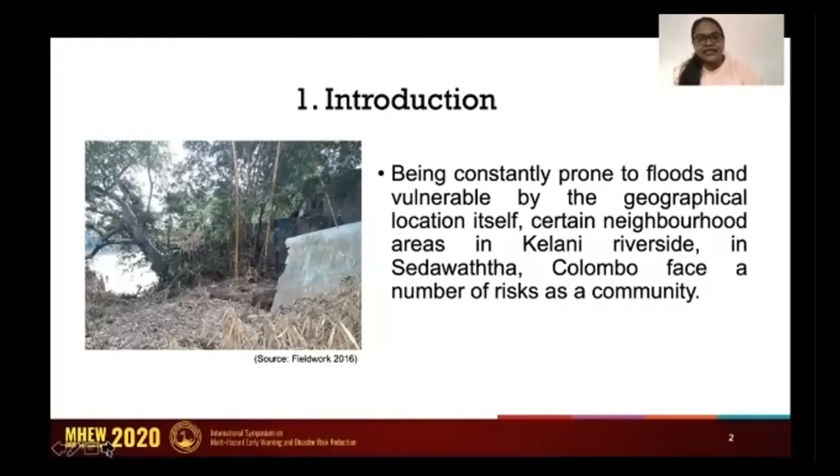Hello, I am Unnati Samaravira. My topic is flood survivors or flood dependents, a societal reading of flood victims in urban Sri Lanka. Moving directly to the introduction: though the narratives of flood-affected communities are pivotal to understanding the post-disaster context, they remain often neglected while developing DRR programs in Sri Lanka. People who live by the Kelani riverside form a community not only because of their geographical location itself, but also due to their socioeconomic backgrounds. Therefore, this study aims to examine the role of flood-affected people in the post-flood disaster context, particularly during the reactive recovery and reconstruction stages.

Speaking of methodology, using the purposive sampling method, this research is based on 50 questionnaires with flood-affected households, 25 in-depth interviews with flood-affected people, and 2 structured interviews with officials in Sedawaththa Grama Niladhari division in Kolonnawa.

Moving to key findings and discussion, I would like to provide two quotations from interview transcripts. Meena said, "When we heard that flood was about to reach, my brother-in-law came in his van. We hired a small lorry and left the house immediately. We took almost every valuable thing with us. Luckily we did it, because when we came back to check on the house after the flood, it was muddy and fully ruined. So my husband and I came with some male relatives and cleaned the house before returning back."

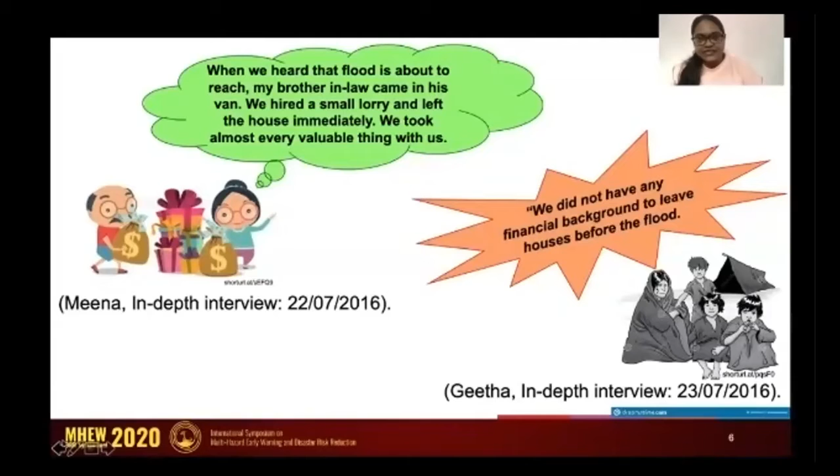The class dimension and available social supportive networks have played a major role during the reactive recovery and reconstruction phases of flood-affected people. Most of the flood-affected males were daily laborers whose income source is largely derived from the informal sector. Even their wives were from the informal sector, being either housewives, domestic servants on a daily income basis, or temporary cleaning staff. When they faced the flood hazard, not only were they financially ill-equipped to deal with such hazards, but they also suffered temporary unemployment, which later extended to permanent unemployment.

Therefore, flood-affected people with low-income financial and social support backgrounds in Sedawaththa can be identified as flood victims who have experienced an unexpected flood magnitude and have become helpless and powerless financially, socially, and politically.

Even though their identity reflects their victimization, the unexplored element is how they attempted to resume their lives as flood survivors as opposed to victims.

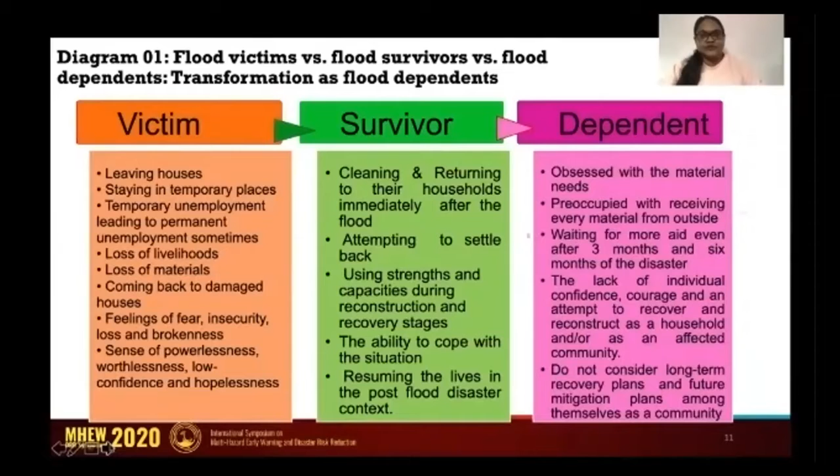Their notion of waiting for more aid and overwhelming material dependency upon any goods distributed as aid prove the fact that the flood victim identity has eventually transformed into flood dependent, as opposed to flood survivors.

When the survivors of the most roof-damaged households received asbestos sheets to repair their roofs, others who did not have their roofs damaged also went and complained, saying they also needed it. When a water rehabilitation program and garbage collection program were carried out in the affected area, the support and participation of the flood-affected community was at a minimum. They had a list which was provided to anybody who they thought would come with aid.

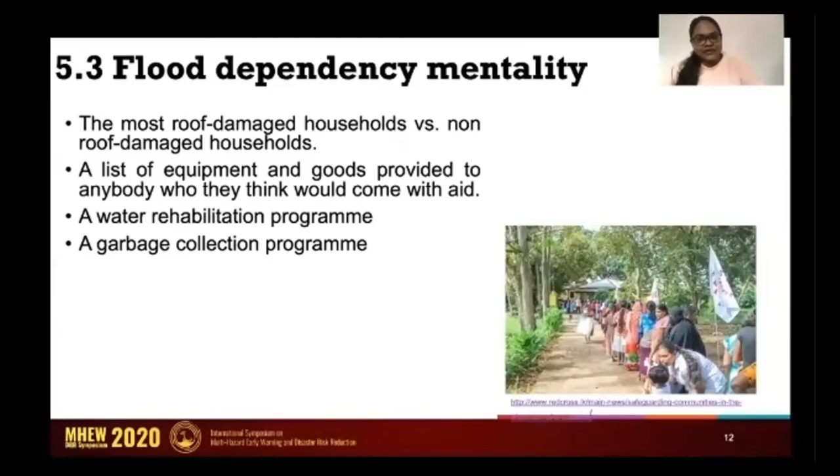Six months after the flood, the majority of flood-affected narratives of low-income residents revealed a notion of financial and material dependency upon non-affected communities and other supporting agencies, including the government. They believe that the sole responsibility of flood risk reduction is upon the government authorities. This shifting of responsibility to external entities has been part and parcel of the dependency mentality of flood-affected survivors who have become dependents due to the disaster.

In conclusion, this presentation argued how flood-affected people, being a vulnerable group, understand themselves and are presented by external agencies. They become flood victims during the reactive stage, who transform themselves into flood survivors, and then subsequently become flood dependents during recovery and reconstruction stages, with the continuous flow of financial and material support provided by external entities, including the government.

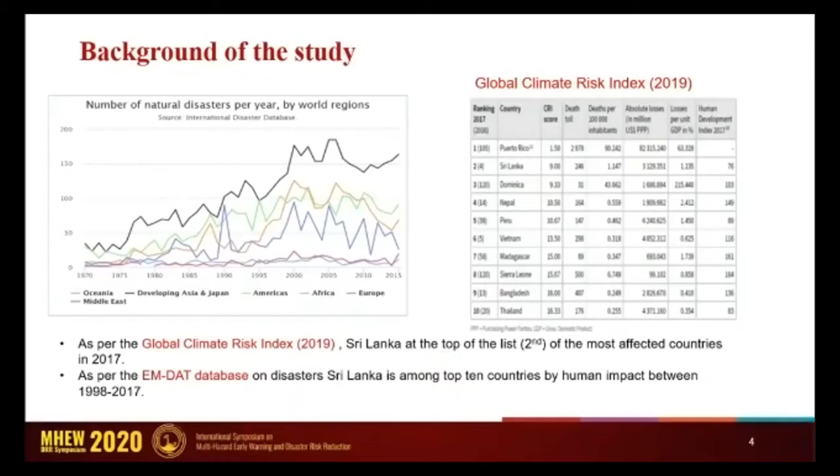When we focused on different regions and specific countries, we can see that during the period 1970 to 2015, developing Asia and Japan were the hardest hit region by disasters. If we look specifically at our own country, according to the Global Climate Risk Index, Sri Lanka was in second place in 2017 in terms of disaster impact, and in 2016 it was fourth place. Also, according to the EM-DAT database, Sri Lanka is among the top 10 countries by human impact.

Considering the literature on the impact of disasters on different economic segments and the outlook of the Sri Lankan economy, we will find out the impact of disasters on different economic sectors. Do the impacts of disasters vary between regions, and do some regions cope better with natural disasters? How do different segments of the economy perform after a disaster event?

For this study, our dataset comprises GDP of different economic sectors and a disaster index constructed for the purpose of measuring the impact of disasters. The index was constructed by normalizing the population affected from a disaster event by the population of the previous year. We have taken it as a percentage.

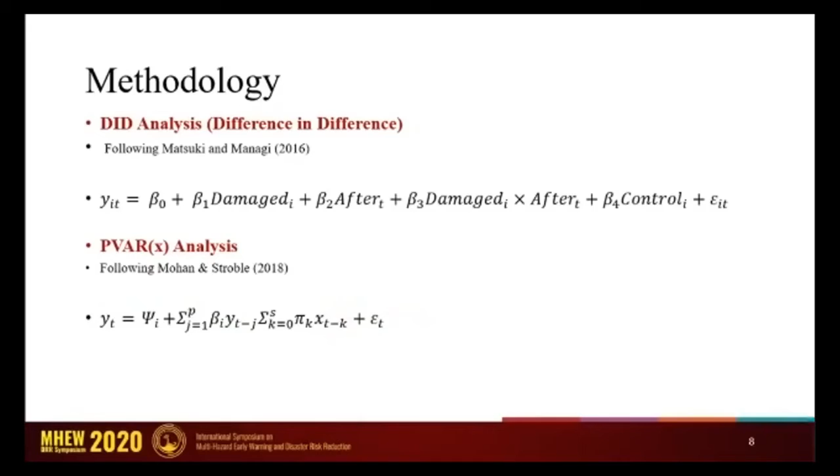Moving into the results, first I will explain the results of the DID analysis. In 2005, there was around a 7% decline in growth for both agriculture and industry. However, in 2006, only the agriculture sector showed a negative impact, while both the industry and services sectors grew significantly. In 2007, the growth continued through the year, although the impact on agriculture continued to be negative. Even though these results are indicative, they help confirm that the agriculture sector is the most highly impacted sector from disasters, while the industry and services sectors have shown improvement.

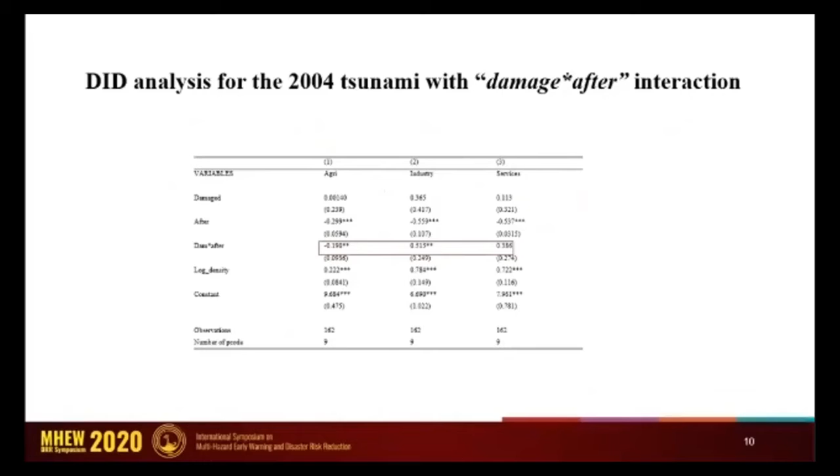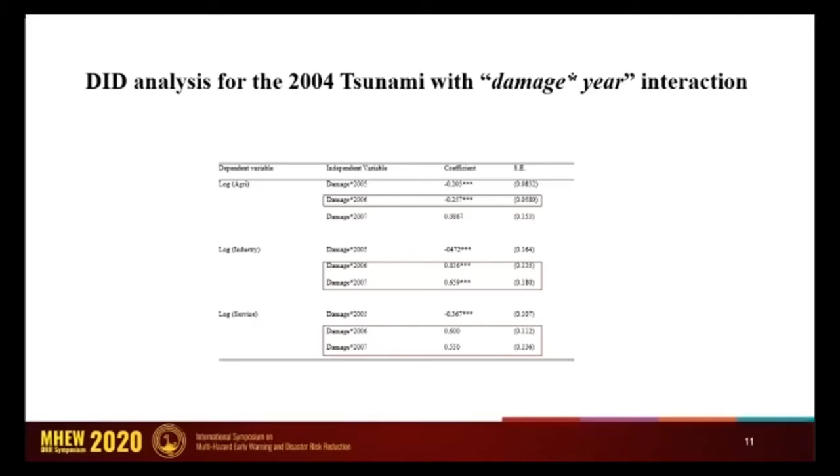These results indicate the increase in demand for reconstruction and building back better infrastructure after disasters, as well as considerable aid and grants being received for advancement of the industrial and services sectors. Further to that, the services sector generates more services during a catastrophic event and also increases the GDP of the sector. These backgrounds might surely contribute to the results.

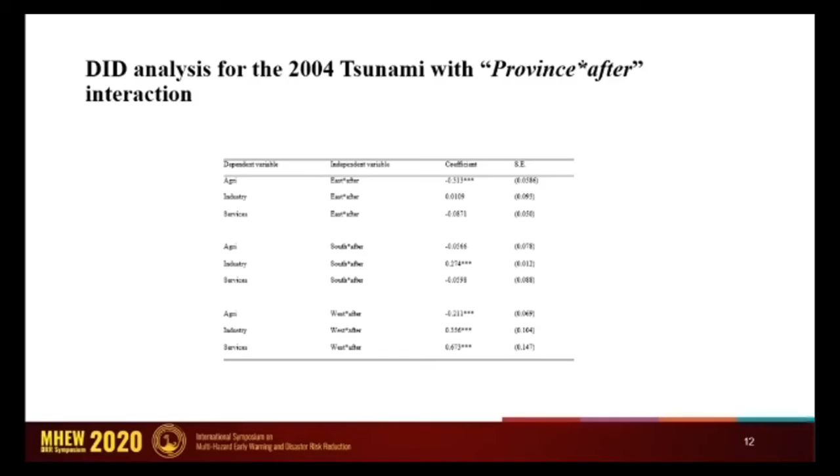The previous results as well as the past literature support this conclusion. A possible reason for this behavior is that after a disaster, governments typically take action to immediately repair damaged infrastructure. As well, new machinery and technology are likely to be purchased by governments, which may be funded by foreign aid and can also improve the sector's growth.

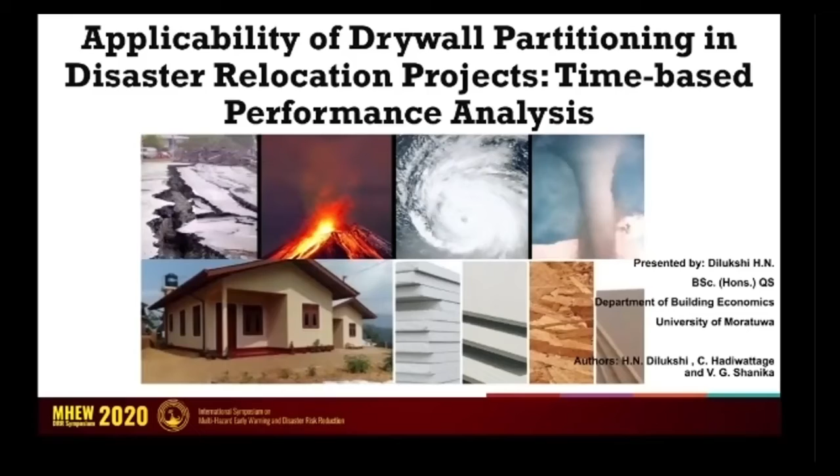Hello ladies and gentlemen, I am Dilukshi from University of Moratuwa. I am here to deliver a research on the applicability of drywall partitioning in disaster relocation projects. As far as the research outline is concerned, research findings comprehend both literature and empirical findings. Obviously, the outline leads us to the research background.

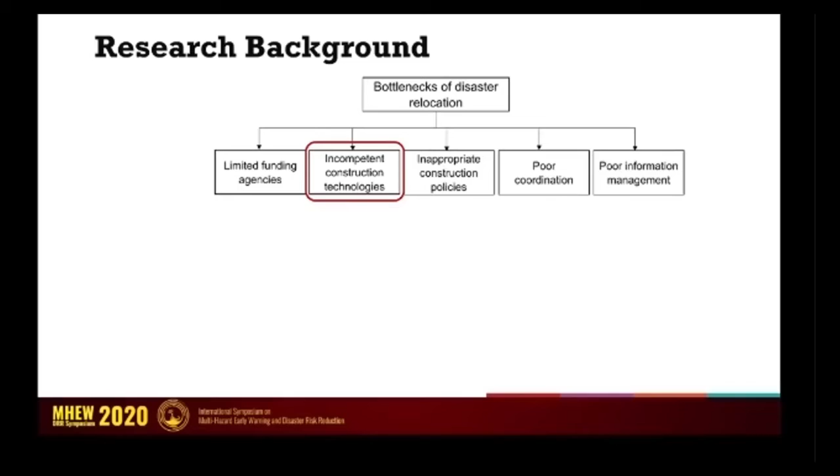As you can see, bottlenecks of disaster relocation contain 5 domains. Out of those 5, the third priority of the Sendai framework highlights the need of reviving incompetent construction technologies. Therefore, it's a crucial area to research. Especially among various building technologies, wall construction technology highly impacts the overall efficiency of post-disaster house reconstruction.

It is because of the high requirement of materials and labor hours when using traditional wall construction technologies. Literature synthesis highlights the performance of drywall technologies. For example, it has already established the better performance of drywall technologies for earthquake-induced disaster relocation projects. Thus, this study focused on measuring the applicability of drywall technologies for disaster relocation projects. Further, this study focused on the time-related performance of drywall technologies.

The problem is how we can answer this research question. So let's take a look into aim and objectives.

Our aim was to investigate the time-based performances of drywall technologies in response to integrated challenges of disaster relocation. As the intermediate milestones of this study, first it was to review the time-related challenges probed in disaster relocation and sort out wall construction challenges. Next, examine time-based performance of drywall technologies. And finally, rank different drywall technologies against time-related wall construction requirements.

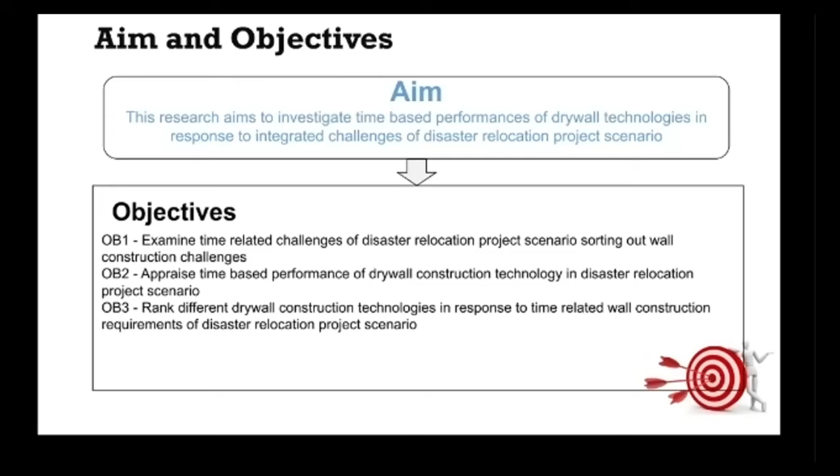Now I'd like to discuss the research methodology we adopted. This study employed a mixed research approach, as both qualitative and quantitative data were collected from the preliminary interview and questionnaire survey respectively. Preliminary interview process was carried out with 3 experts: 2 experts from disaster relocation and 1 expert from drywall technologies. All 3 were having more than 10 years of experience from their respective fields.

A sample of 48 experts was obtained for the questionnaire survey from 4 different fields to consolidate the findings. 3 quantitative data analysis tools were used: skewness, standard deviation, and mean weighted rating.

So now we come to the next section of the presentation, which is research findings and analysis. Here, OB code refers to the relative objective of the study achieved.

Time is a challenging parameter for disaster relocation because it is urgent to rectify the normal routine of the community, as well as to prevent spontaneous irregular resettlements on unsafe lands. When it comes to wall construction challenges, traditional wall construction technologies show a lack in performance in terms of time for disaster relocation projects because of its high time consumption during on-site process.

Existing research has already investigated the time-related performance of several drywall technologies for disaster relocation projects. For example, one study revealed that EPS panels consume 1.5 days of unskilled labor for a 130 square foot room, referring to the Sri Lankan context.

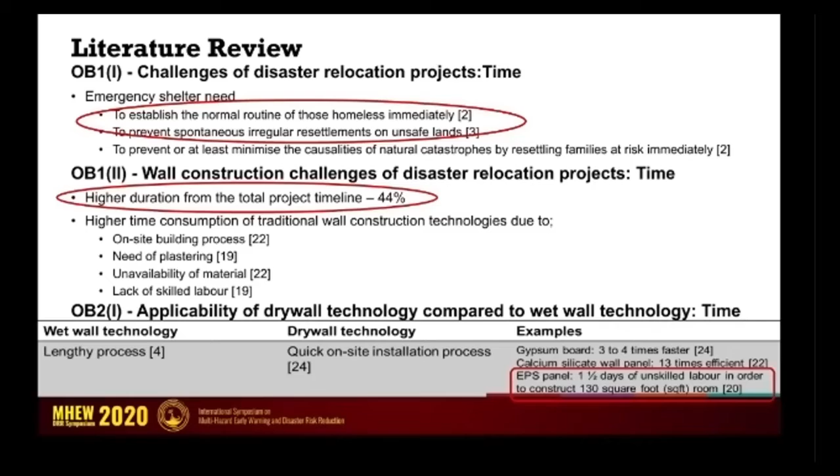So let's turn the discussion into empirical findings. Preliminary interview analysis divided the time efficiency requirement of wall construction into 2: on-site efficiency and off-site efficiency. Next, questionnaire survey ranked those 2 requirements representing the priority level for disaster relocation. Ranking was based on mean weighted rating values obtained from analyzing the responses of the questionnaire survey.

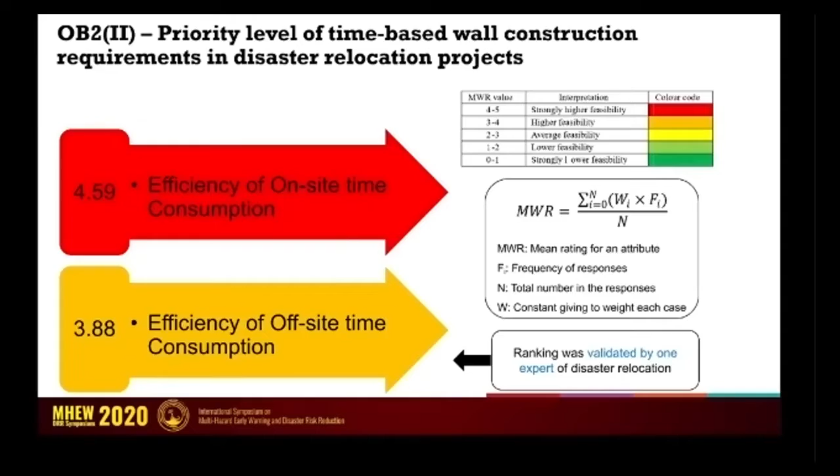Let's talk about the scorecard of 10 different drywall technologies. Now, the matter is where these drywall technologies came from. Literature synthesis reflected 18 possible drywall technologies, but experts of the preliminary interview omitted 8 drywall technologies considering the availability for mass construction such as disaster relocation in Sri Lanka, and ultimately shortlisted into 10.

Each score represents the feasibility of each drywall technology under each time efficiency requirement. Here, scores are mean weighted rating values obtained from analyzing the responses of the questionnaire survey. At the upper right corner, you can see the color code, which delineates the feasibility levels of drywall technologies. According to the color code, the first three are the most feasible drywall technologies under both on-site and off-site efficiency requirements, and the rest of the scores situate within the higher feasibility range.

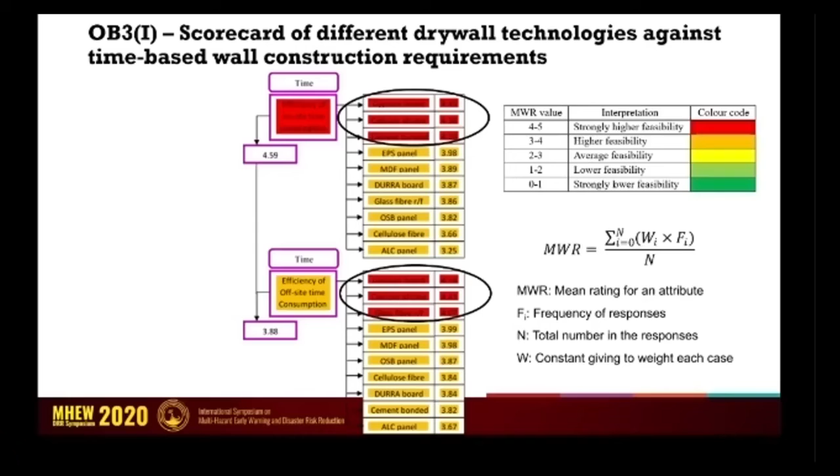I think this graphical illustration clearly shows the ranking of the overall time-based performance of different drywall technologies for disaster relocation. It's in descending order from top to bottom. Mean weighted rating values obtained from the scorecard were applied to this equation in order to derive the overall time-based feasibility of each drywall technology. As you can see in the graphical illustration, it delivers gypsum board partitions as the most efficient drywall technology for disaster relocation projects, and calcium silicate wall panel board comes next in the order.

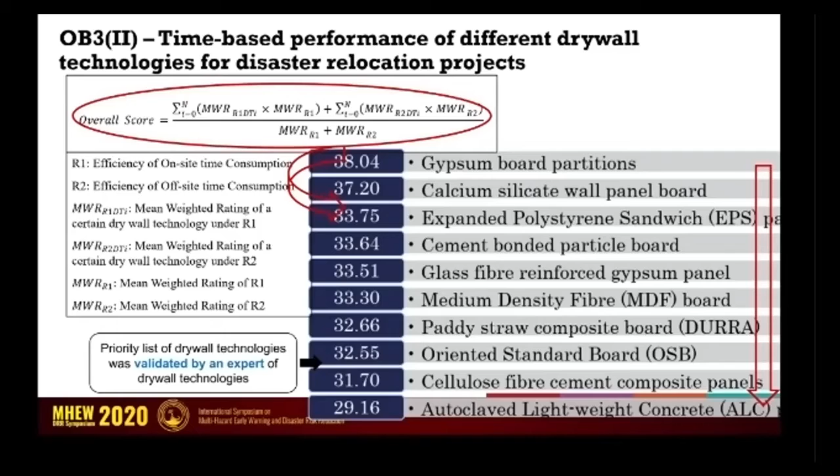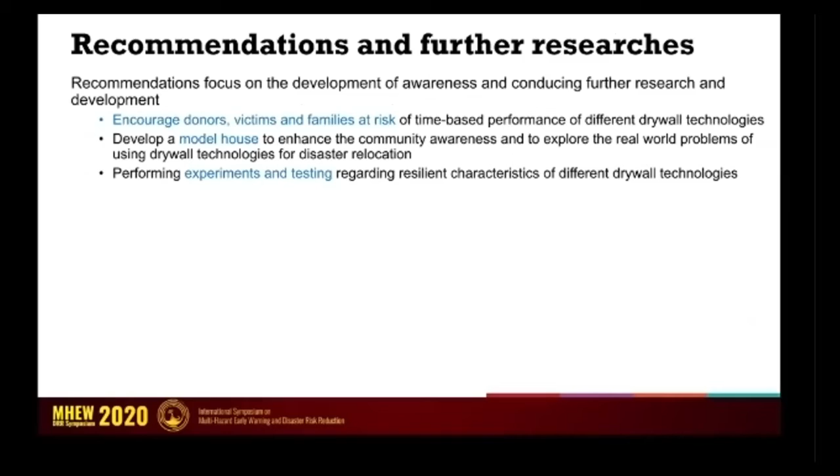In any research, the most important part is how we can use the findings in reality. Therefore, to put the findings into practice, recommendations focus on enhancing the awareness of the time-related benefits of different drywall technologies to donors, victims, and families at risk.

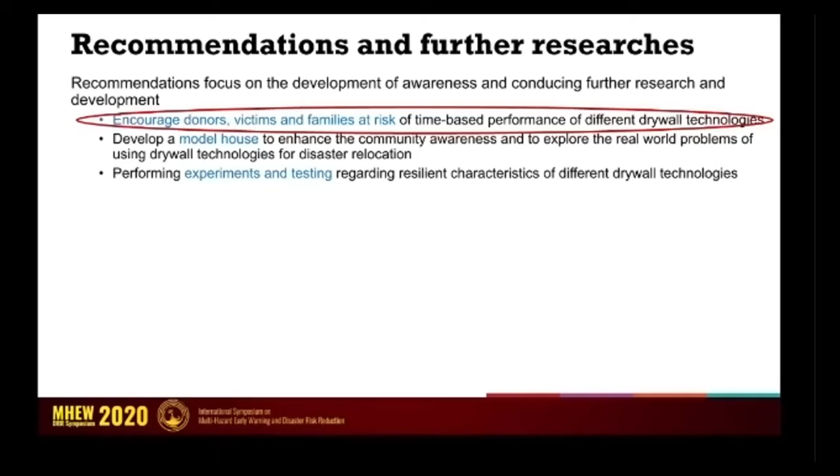Earthquake-resilient characteristics of drywall technologies are already established, as I previously mentioned, but it needs further research and development to test the other resilient characteristics as well.

Now I can just summarize the main points again, clustering into the objectives of this study. Traditional wall construction consumes 44% of the total project timeline in disaster relocation projects. Literature provides a narrow view of the time-related performance of drywall technologies, roughly establishing the 3 to 4 times higher performance of drywall technologies. The scorecard facilitates a comparative analysis of the time-based performance of different drywall technologies to practice in disaster relocation projects.

Finally, gypsum board, calcium silicate panels, and cement bonded particle board represented the best performance under on-site time consumption efficiency. Gypsum board, calcium silicate panels, and glass fiber reinforced panels became top ranks under off-site time consumption efficiency. Ultimately, this research will be a crucial investigation to resettle both victims in disaster relocation and families at risk.

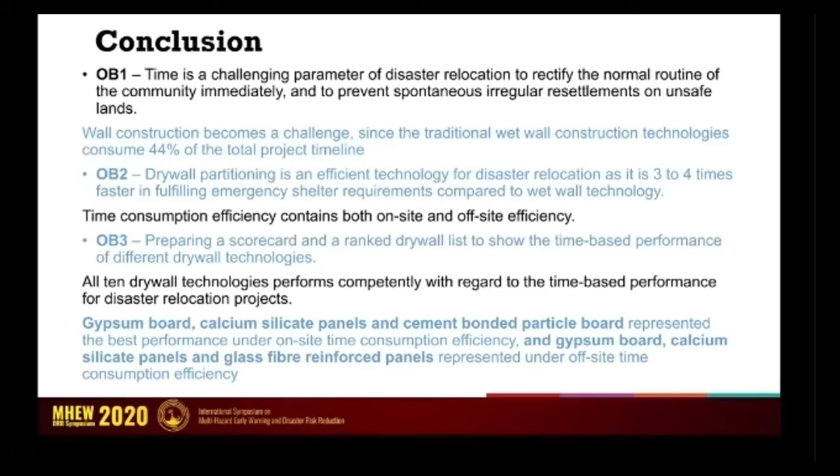Thanks very much, Nimasha, for the video and the presentation. We do have Nimasha with us in the audience. So, any questions to Nimasha? Any questions? We do have more people in the audience as well. So please do engage and ask questions. Get any issues that you have clarified from our presenters. Any questions to Nimasha in the audience? Can't see anything in chat.

Okay, while we wait for a question, Nimasha, have you observed drywall partitioning being used in any sort of post-disaster reconstruction or relocation project in Sri Lanka as of now or previously?

No, not yet. Drywall technologies are currently not used for disaster relocation projects in Sri Lanka, even though drywall technologies have a spectrum of advantages for house reconstruction, especially regarding time efficiency. But NBRO is still researching the use of drywall technologies. I think this piece of research would inherently be supportive for the way forward of combining drywall technologies and disaster relocation projects.

Okay, that's very interesting. It's good to hear that NBRO is engaged in that research as well. Another question: what do you think about the resilient aspect of drywall technology? Say, for example, if the same area, let's say we're talking about a flood prone region, and that same area gets flooded again,

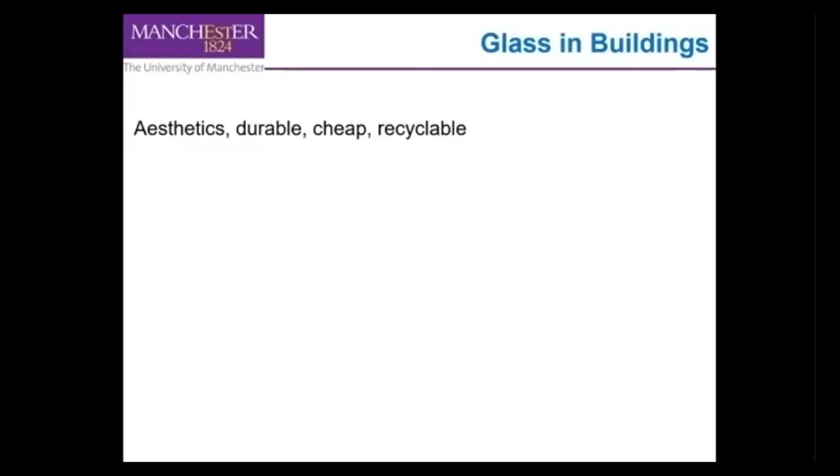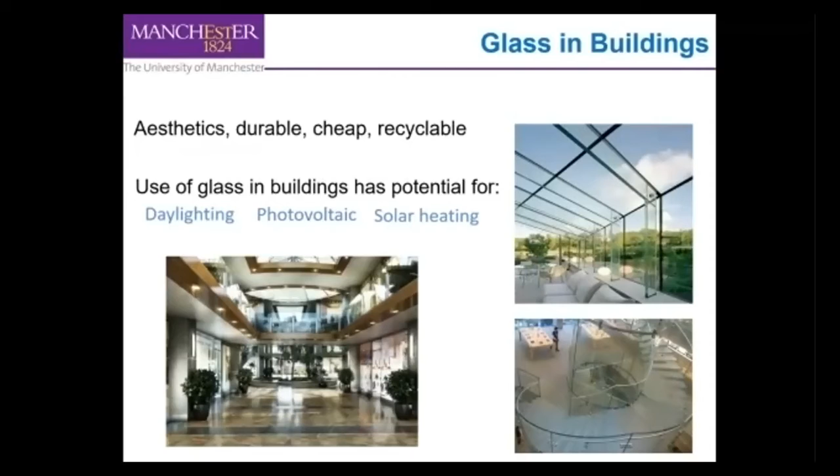We all know that glass is increasingly becoming a more popular construction material. The main reason architects really like it is because of its aesthetic characteristics. Glass is durable and cheap, and also recyclable - this recycling aspect, the circular economy type things, are really useful these days. You can make perfect glass from old glass, which is not true for most other materials. As I said, it can improve daylighting characteristics, and we can also gain solar energy as well as solar heating.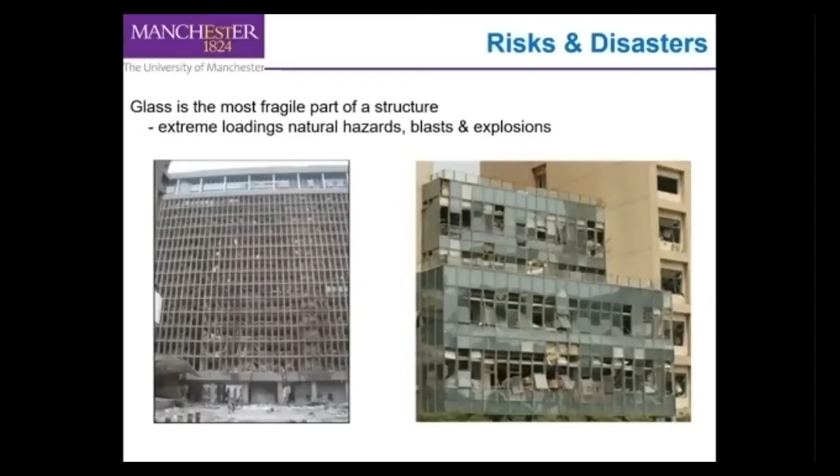However, unfortunately, although glass has so many favorable characteristics, it has some issues as well. It's usually the most fragile part of a structure under an extreme loading event. For example, as you can see in these two photos, these are real situations from the past. In both cases, glass panels were removed from the building, whereas the main structure or the other parts of the structure remained largely intact, which shows a clear problem with glass during an extreme event.

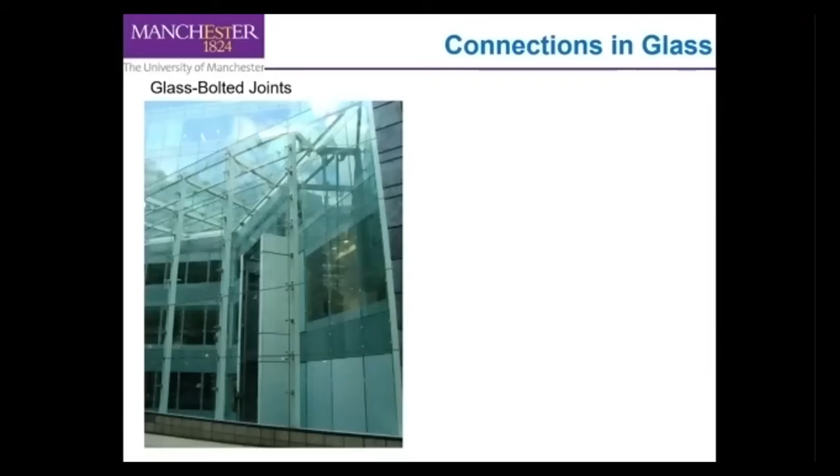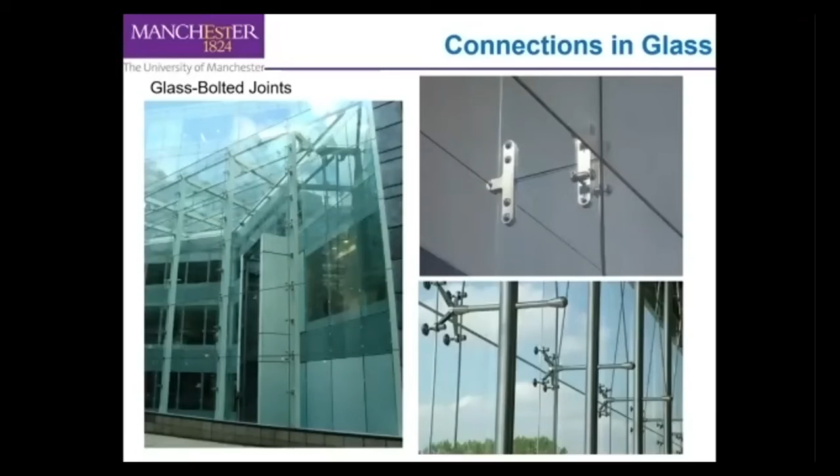The reason for that is actually the inefficiency of the joints we use. As you can see, we use a number of designs like bolted joint connections. This one shows connecting glass panels to glass panels using this type of joint, and this joint shows connecting a glass panel to a main structure - these types of joints are called spider joints. You may not be surprised by the name. People use this, but unfortunately it's not the most efficient and safe.

Because glass is a brittle material with low tensile strength compared to steel or aluminium, whereas to make bolted joints we had to make holes, damaging the surface. This means we weaken the surface at highly localized stress concentration areas. High stress concentration combined with weak material means it's not surprising we will see failures at the joints. Because of this, in most glass structural design, the joint design governs the actual design, which results in usually thick and heavy panels, because you need to make sure the joint can carry the loads. It's not efficient, obviously.

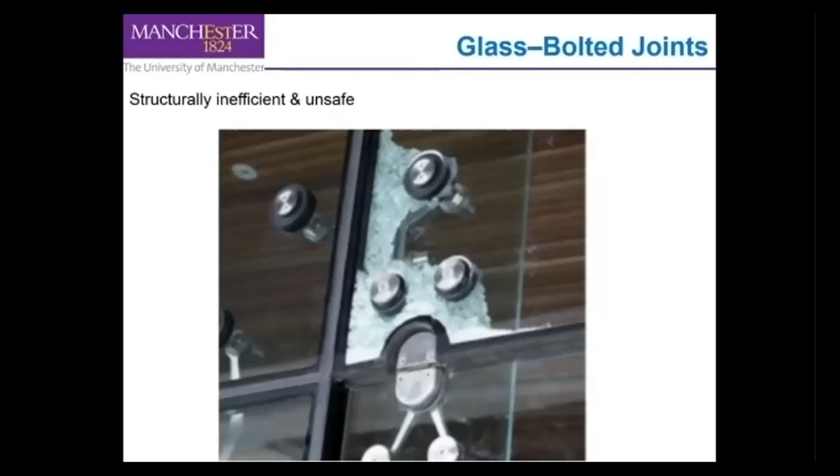So what we did in our research program, we tested a few glass bolted joint configurations. You can see 2-layer glass - I mean we fixed 2 glass specimens using a bolted joint arrangement. We use aluminum plates to connect the test specimen into the loading machine, because we can't fix glass directly into the loading machine - that would crack the glass prematurely. That's why glass is a difficult material to handle, to be honest. So we did this arrangement.

We tested this loading arrangement using annealed glass, which is the basic glass. As expected, the failure happened across the bolted joint. You can see here and here, and the middle area, which is far away from the joints, remained mostly intact. The reason for that, as I said, is stress concentration and weak material close to the joint. So obviously we are wasting the material in the middle region because the joint caused the failure.

So this is the annealed glass. There's another type called heat strengthened glass or tempered glass, which has high tensile strength. People try to solve the low strength characteristic of glass by using this strengthened glass. But unfortunately, strengthened glass alone cannot solve the problem, because this is the failure of the same joint configuration with strengthened glass. Actually, you can't even see the glass - it failed into very small pieces, so it's not safe, and you can't recommend this type of failure in a structure because it completely collapses.

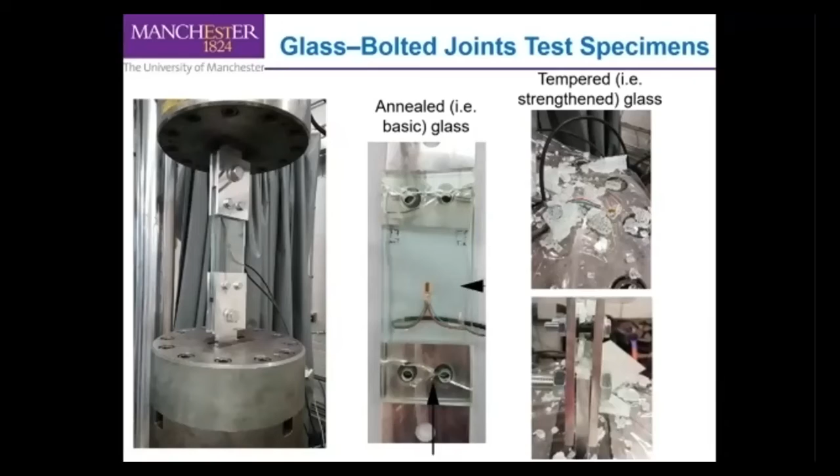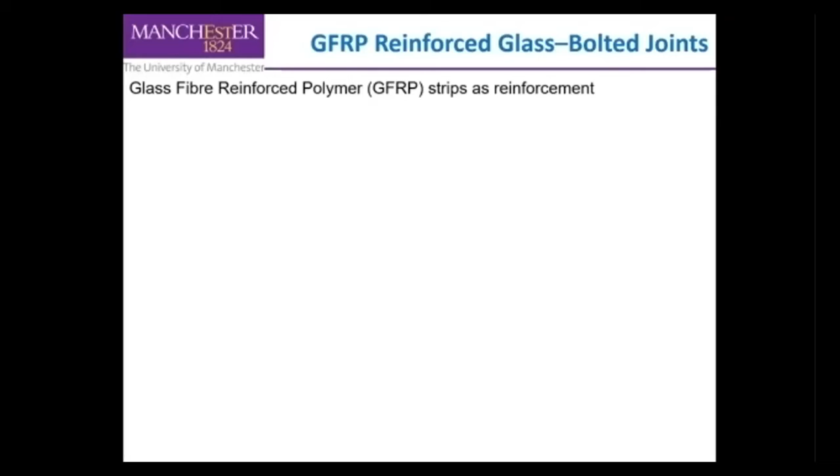So what we did - we got some motivation from the reinforced concrete concept, because concrete alone is a similar material to glass with low tensile strength. However, we know people have used reinforced concrete for over 100 years with very successful applications. That's because they apply steel reinforcement, which can take the tensile stresses, whereas the concrete still remains in compression. We got that motivation and tried to see whether we can reinforce glass, because glass itself is a brittle material like concrete. So we used glass fiber reinforced polymer, GFRP.

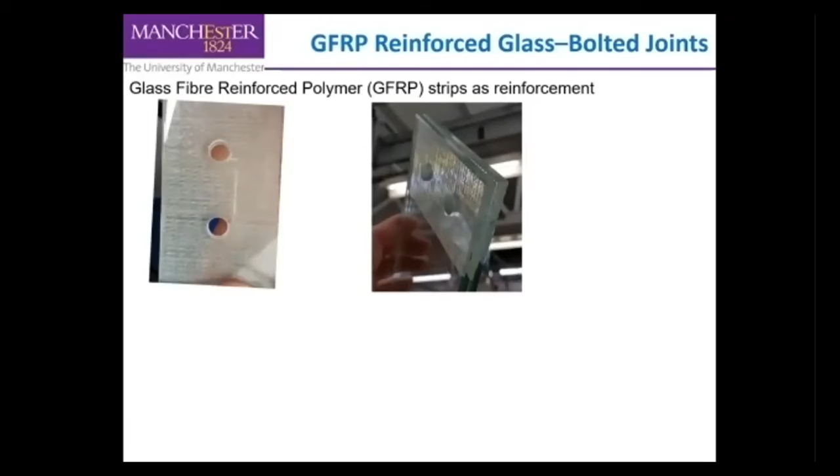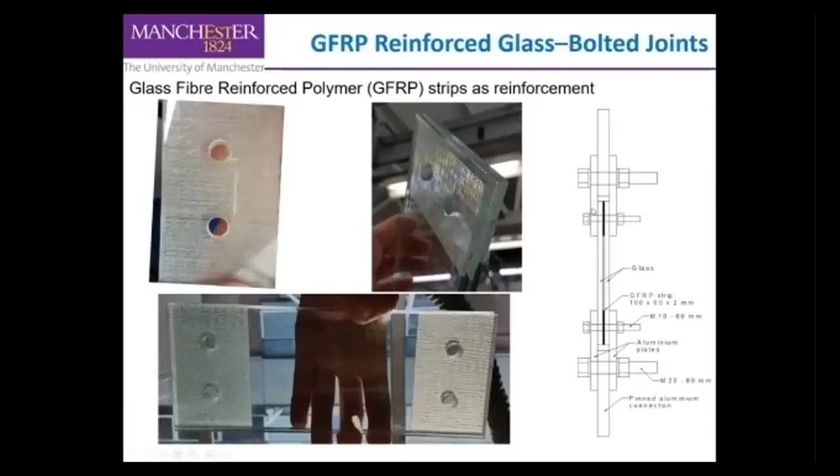We joined a small GFRP strip to reinforce the joint around the joint area. This is what the test specimen looks like, arranged in the same way with the aluminum plates at the end, and we tested it - you can see these GFRP strips covered the joint area. When we did that, we got the failure again across the joint area, and the middle part, which is far away from the joint, remained intact. But however, we can see...

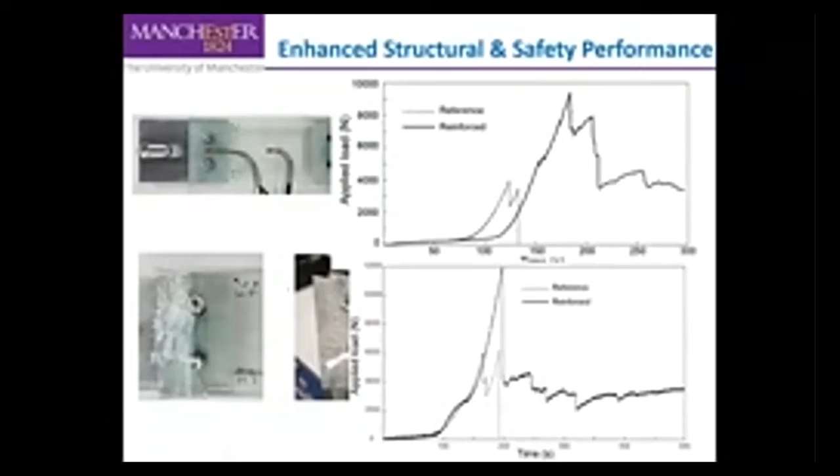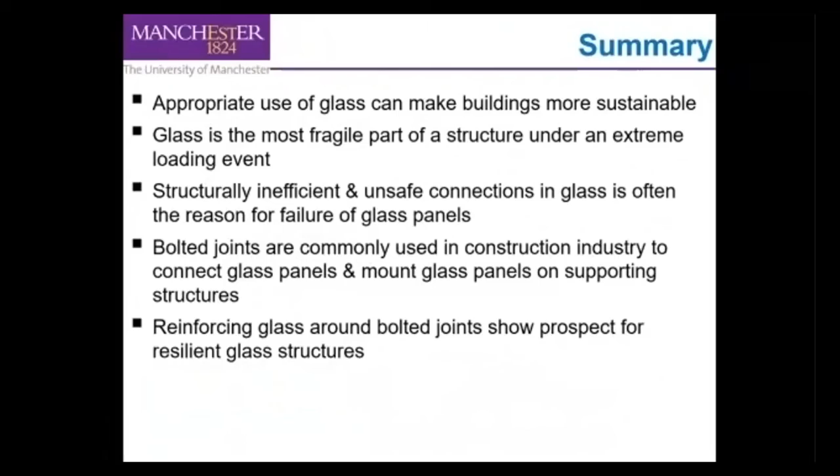So we can say the concept works for both the annealed glass as well as the heat-strengthened glass. I want to summarize this presentation. Appropriate use of glass can make buildings more sustainable, but in current design practice, glass is very fragile in a building structure and unsafe in an extreme load event case. However, there's potential, and the joint is the weakest point, so reinforcement concept for joints actually has potential to make glass structures more resilient and sustainable.

With that, I would like to thank the symposium organizers for inviting me for this presentation. You can contact me if you're interested in knowing more details about glass design, because it's not as common or famous as reinforced concrete, steel or timber design, but there is new information developing. For example, this technical publication from the Institution of Structural Engineers on structural aspects of cladding was published early this year, and I was a co-author as well as a steering committee member. Thank you everyone, and hope we can join live now. If you have any questions, I'm more than happy to talk with you. Thank you.

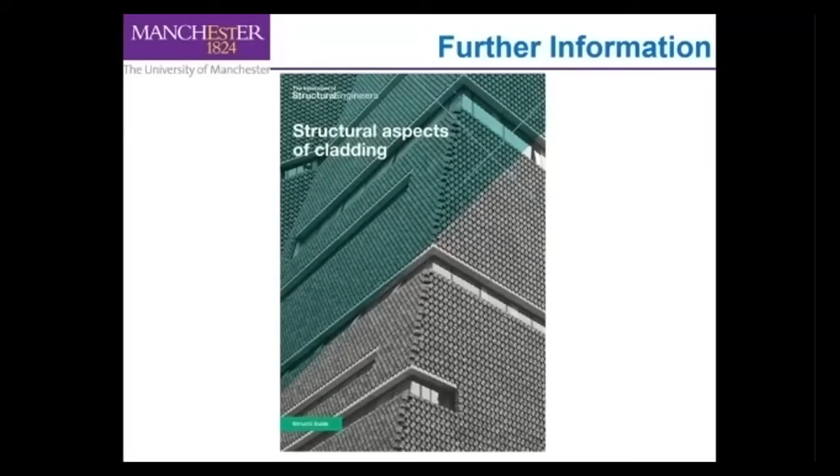Thanks, Mithila. Excellent presentation and excellent research as well on technical aspects of glass and how it can be used in buildings. We have Mithila with us in the audience, so any questions? By the way, sorry, I said you're from Southampton.

Looks like no, actually, you're right. Previously I was there, and recently I moved to Manchester. I should have explained earlier. No problem, don't worry. Any questions to Mithila from the audience?

Any questions? This is slightly out of the scope of the overall conference, I believe - disaster risk. No, not really, because it's building technologies and how we can integrate them into our built environment, that's why I wanted to send the abstract. I think the conference was originally planned to be held in March, is that right? Yeah, early this year. But can I ask one question, Nathan?

Is this technology being used even in the UK, or is it at the conceptual stage as of now? My study is a proof of concept study, and we have some interest from industrial partners, but not at the moment - they just use these bolted joints currently. Okay, good luck with the work, and hopefully it will come as a new technology in buildings.

Any observations, Janat? Anything? For example, sharing data. Actually, Doctor, this is a very interesting presentation. I think this can be used in high-risk zones - hospitals, emergency departments, surgery theaters - and I think this is very useful for our business sector to try. Thank you so much.

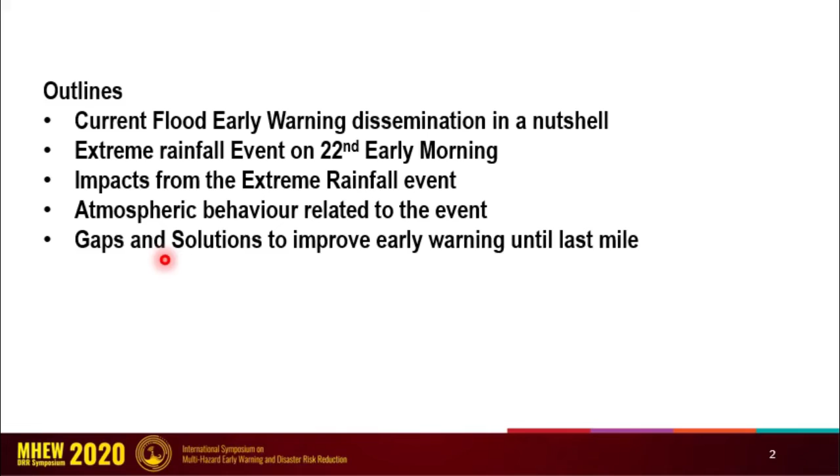These are the outlines of the presentation: current flood early warning dissemination in a nutshell, the extreme rainfall event on 22nd early morning, impact from the extreme rainfall event, atmospheric behavior related to the event, and finally gaps and solutions to improve early warning until the last mile.

This is the current early warning dissemination in Sri Lanka. The Department of Meteorology issues short range weather forecasts three times per day at 5:30, 12:30, and 17:30, and disseminates them to DMC and other stakeholders.

If they expect extreme rainfall, they issue a special weather advisory to the irrigation department, DMC, and other stakeholders. Considering river water levels and tank water levels, and using flood models, they issue the possibility of flood to DMC and their stakeholders.

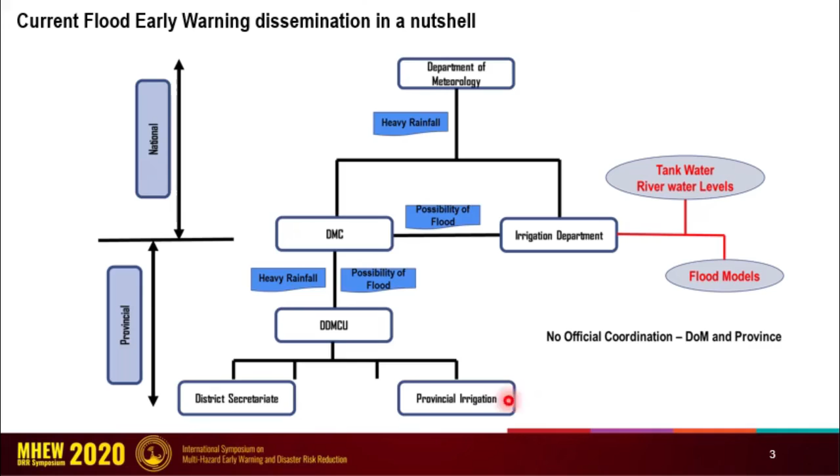DMC disseminates the rainfall forecast and flood forecast to the DDMCU, and then DDMCU disseminates it to district level organizations including the irrigation department.

This is the extreme rainfall event on 22nd early morning. Heavy rains occurred during early morning on 22nd December 2018 in the northern province of Sri Lanka. Within 2 hours, the precipitation level rose up to 300 millimeters at some places over the catchment of Iranamadu Tank. You can see some heavy rainfall figures here, causing impact along the downstream of the Iranamadu Tank.

Iranamadu Tank is somewhere here, this is the Iranamadu catchment, and this is the downstream. The Kilinochchi and Vavuniya districts also received flash flood.

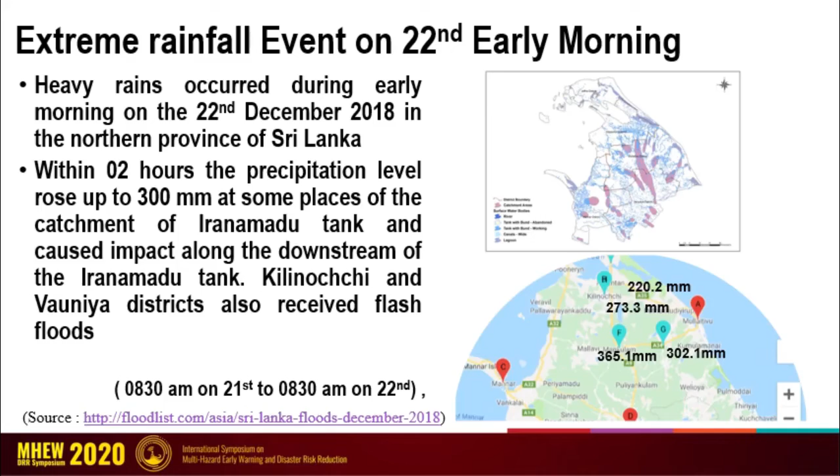But the next day, the northern part received heavy rainfall and caused flood.

These are the impacts from the extreme rainfall event. The Iranamadu tank spilled and impacted people in the downstream. The other major tank is Kanagambikai. There are no spill gates, and the 2008 flood was due to the overflow of the tank.

Only the urban areas were flooded from the spilling of the Kanagambikai tank. People in the area were affected with huge property losses, but there was no loss of life. In addition, large numbers of houses, livestock, agriculture, small and medium entrepreneurs, inland fishing, and roads were also affected in the Kilinochchi district.

The affected districts are Mullaitivu, Kilinochchi, Mannar, Vavuniya, and Jaffna, almost all of the northern province. 8,500 people had been sheltered in 52 welfare camps. Mullaitivu and Kilinochchi were the most affected, and they recorded the highest one-day rainfall over the area since 1983.

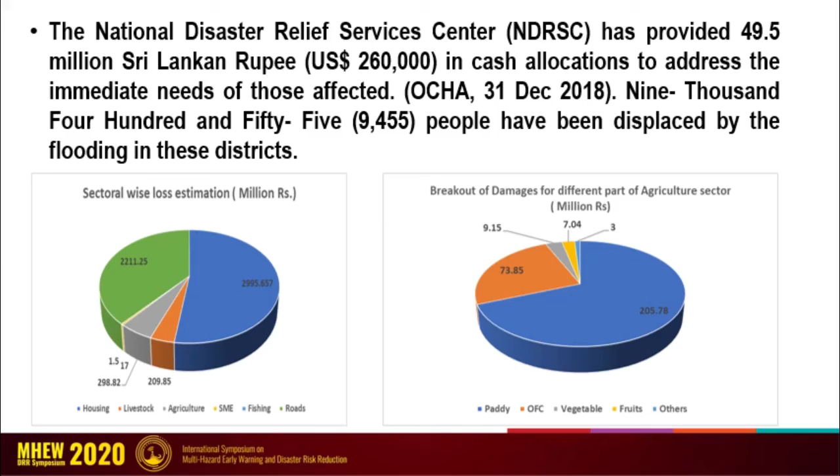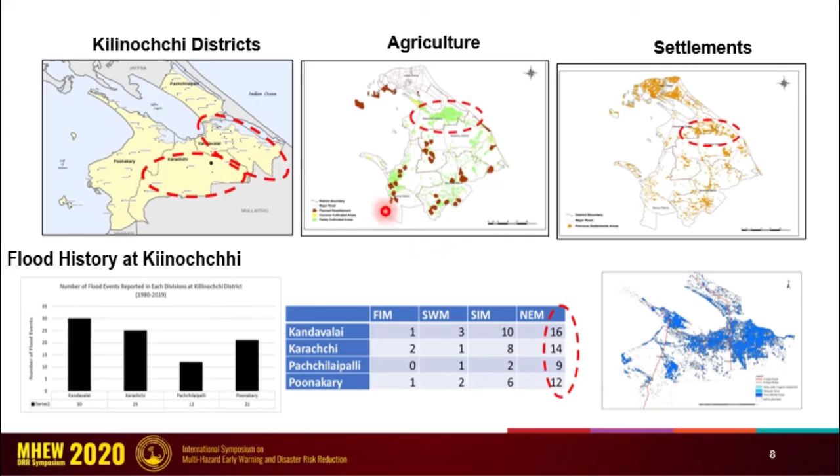You can see the flood history in Kilinochchi. For the 40 years from 1980 to 2019, Kandavalai and Karachchi received more than 25 flood events. The northeast monsoon season is the most vulnerable season for flood.

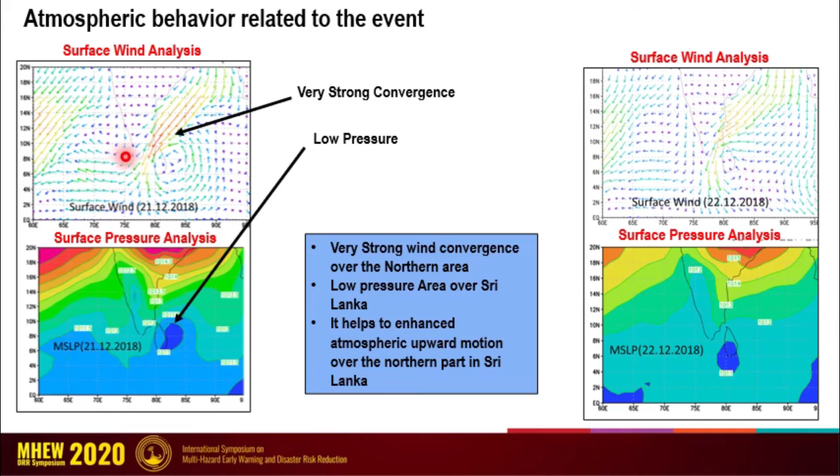Now we focus on the atmospheric behavior related to the event. You can see the wind pattern and pressure distribution on that particular day. There was a low pressure area, and associated with the low pressure area there was a strong circulation. You can see the eastern flow and northeastern flow converge over the north part of Sri Lanka, which helps enhance atmospheric upward motion over the northern part of Sri Lanka.

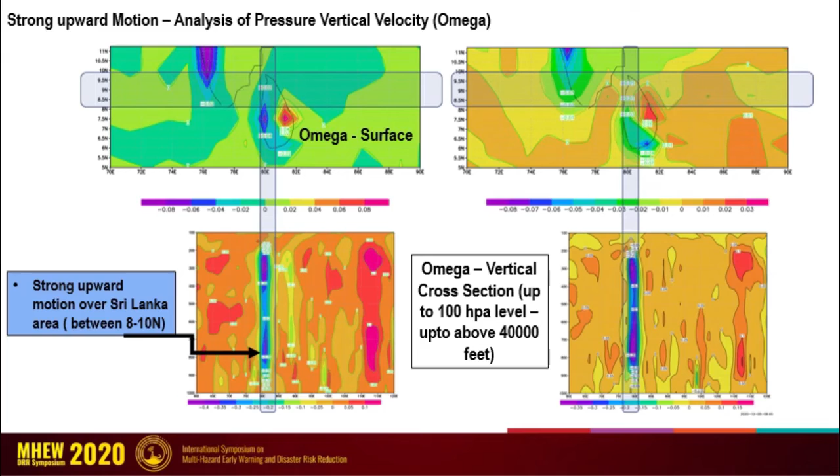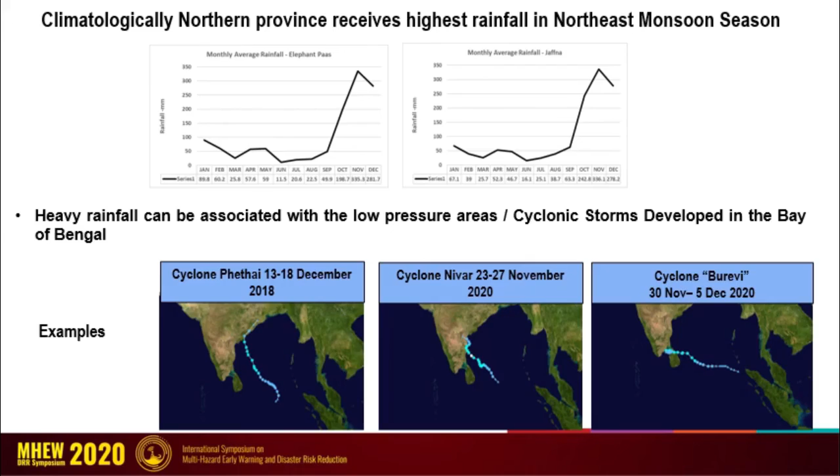The other reason is heavy rainfall can be expected over the north and eastern part with the easterly wave approaching from the Bay of Bengal. That's also a reason. When we summarize, in November and December, the north and east, and not only north and east but even other parts, get heavy rainfall due to cyclones and low pressure areas. Mid-December to January, there's a possibility of heavy rainfall with the easterly waves, and in early December, heavy rainfall can be associated with the onset of the monsoon.

So finally, I'll explain the gaps and solutions to improve early warning until the last mile. The Department of Meteorology issued a forecast mentioning the possibility of heavy rainfall. It mentioned that fairly heavy falls of about 75 millimeters could be expected. So the forecast amount was underestimated.

On 21st December, the water level of Iranamadu tank was just 4 feet below the spill gates. According to the DoM forecast, it predicted heavy rainfall around 75 millimeters on that particular day. The rainfall at Kilinochchi during the daytime on the 21st was 40 millimeters, and they expected 35 millimeters at night. According to that, they calculated the amount of water and identified that it was not enough to fill that 4 feet. So that was one of the gaps.

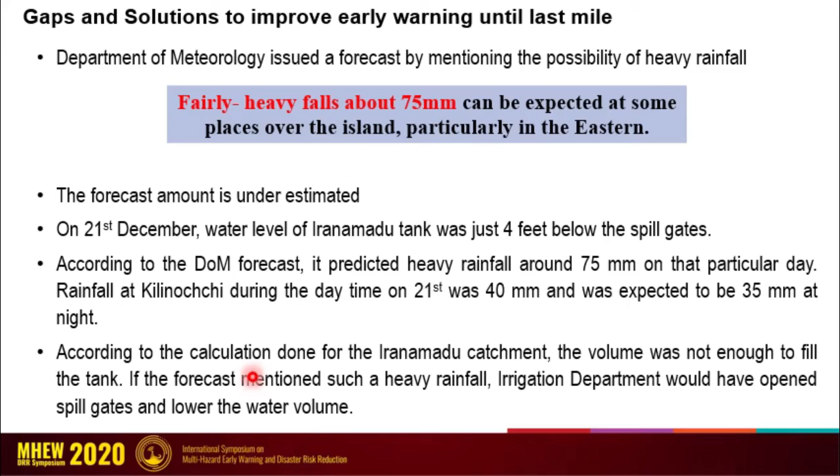When we look at weather prediction at the Department of Meteorology, with the existing infrastructure, they issue weather forecasts and early warnings using observational atmospheric data, numerical weather prediction, satellite data, and their knowledge and experience. Atmospheric analysis is based on global observational data, which updates every 6 hours, and numerical weather prediction is run 2 times per day. They also use satellite images. With this information and its availability, it is not possible to predict the exact amount of rainfall — only the possibility of heavy rainfall can be predicted.

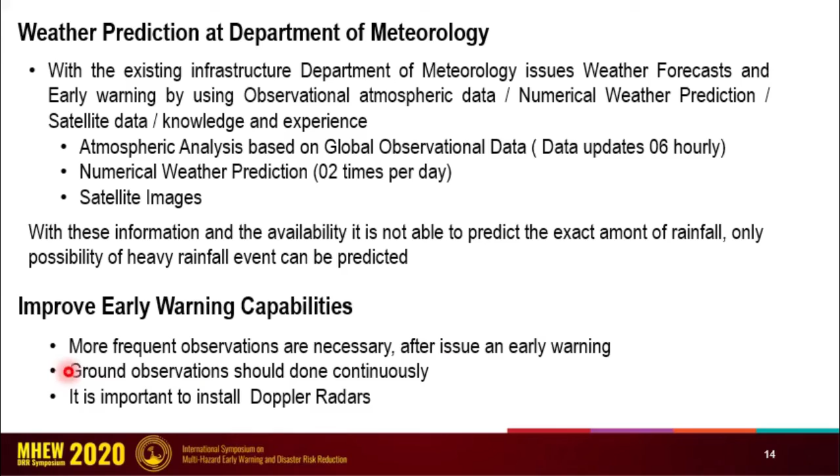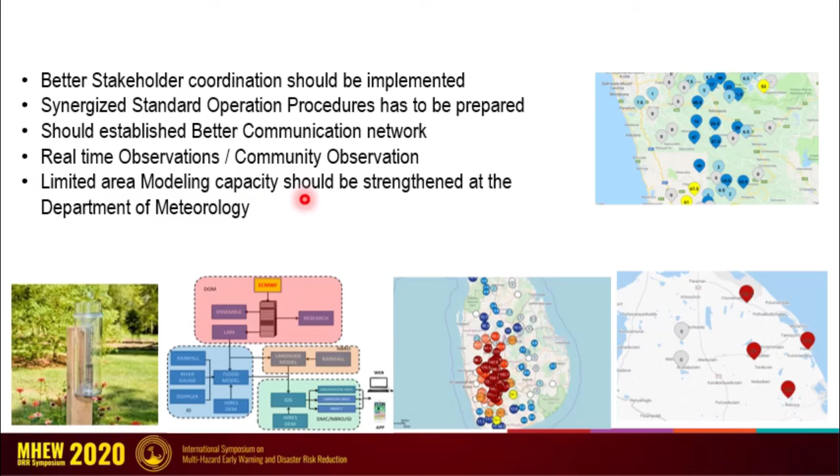To improve warning capabilities, more frequent observations are necessary after issuing an early warning, and ground observation should be done continuously. It's important to install Doppler radar to identify heavy rainfall. Better stakeholder coordination should be implemented, and a synergized SOP should be prepared to establish a better communication network. Real-time observation is also important — these are some examples for real-time observation — and limited area modeling capacity should be strengthened at the Department of Meteorology. Thank you very much.

Good evening, everybody. I would like to give a summary of my case study, which is pluvial flooding in urban areas, and the Boralesgamuwa UC area is taken as the case.

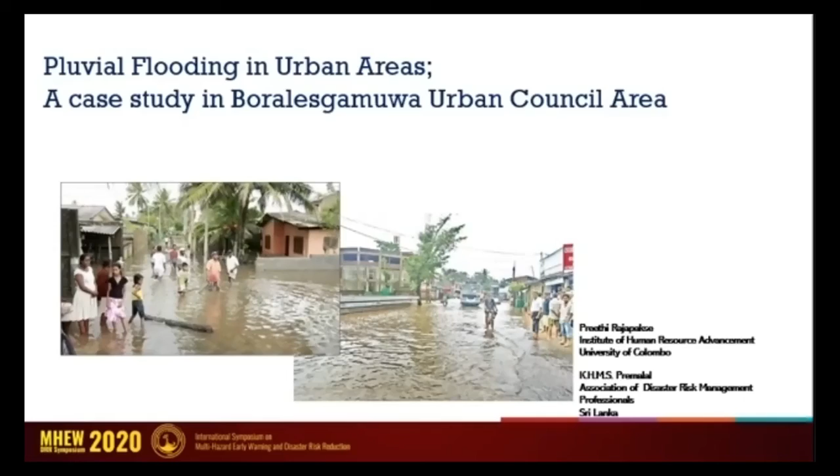People around the world are at risk of pluvial flood, causing huge economic losses with risk to human life in extreme cases. The most common flood is when water levels in rivers rise and overtop their banks, which is called fluvial flood. Another is flooding in coastal areas due to high tide and stormy conditions.

A less well understood flood is pluvial flooding, which is rain-related. It occurs when extreme heavy downpours saturate the urban drainage system and excess water cannot be absorbed. This is dangerous because it occurs without prior warning.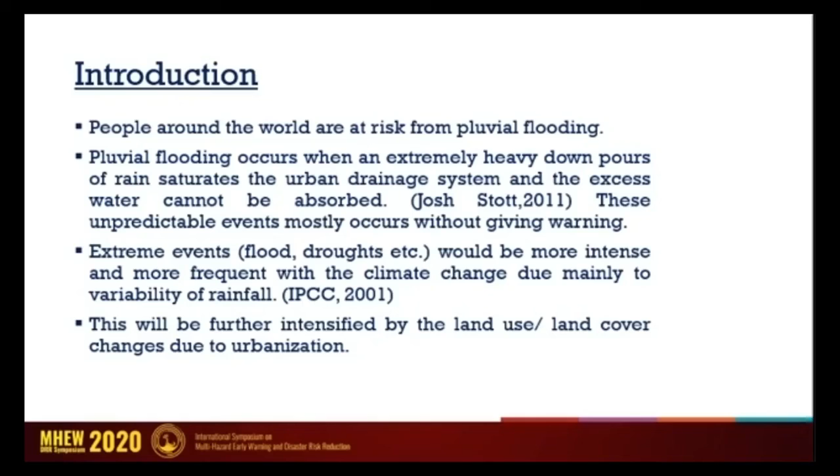Stress factors for pluvial flooding include climate change and land use changes due to urbanization. Urban areas are particularly vulnerable due to their impermeable surfaces, such as paved roads, parking lots, and rooftops, which prevent infiltration and generate increased surface runoff, leading to pluvial flooding.

This study deals with pluvial flood occurrence in urban areas, and Boralesgamuwa UC area was taken as the case. It analyzed recent changes in the characteristics of extreme rainfall, land cover changes over time, and recent drainage development projects done in this area and their implications for flood frequency.

Urban flood data before 1990 was not available, maybe because the frequency of floods was not significant as urbanization was at a minimum.

Colombo metropolitan area and suburbs have rapidly developed during the recent past with the change of global economy. More factories and industries were established in Colombo and surrounding areas since the 1980s with the implementation of open economy policy in Sri Lanka. Parallel to this, garment manufacturing industries were established under the BOI. Hence, more buildings and housing complexes were established with migration from rural areas.

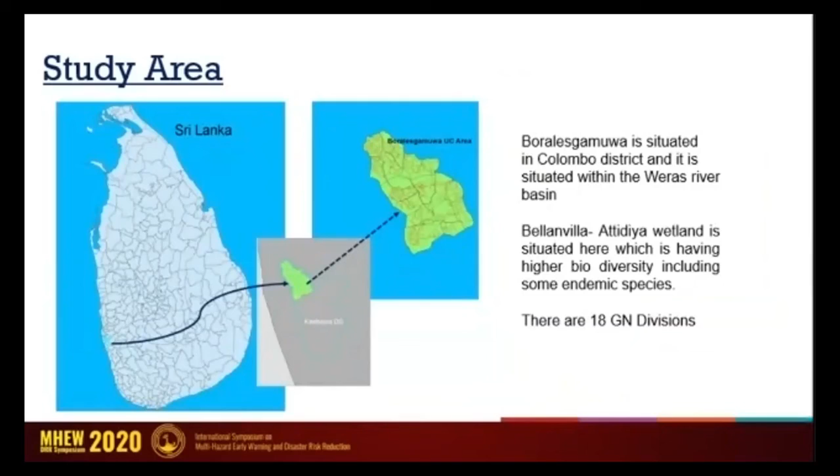The study area is Boralesgamuwa UC area, which is in Colombo district and in the Weras Ganga River Basin. Bellanwila-Attidiya wetland is also here, which is high in biodiversity, including some endemic species. There are 18 GN divisions.

Actually, there are three objectives of this study. One is to determine recent changes of rainfall and its impact on flood frequency. Second is to determine land use changes and how these changes had affected urban flooding of this area. Third is to find out the effectiveness of flood mitigation activities in this area.

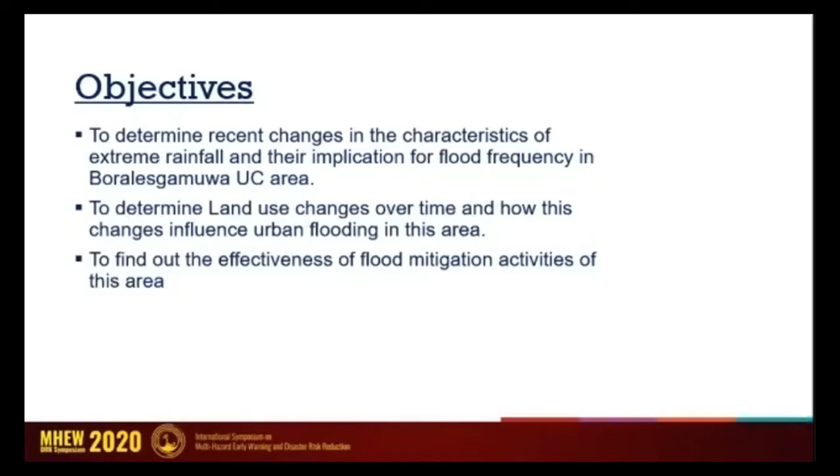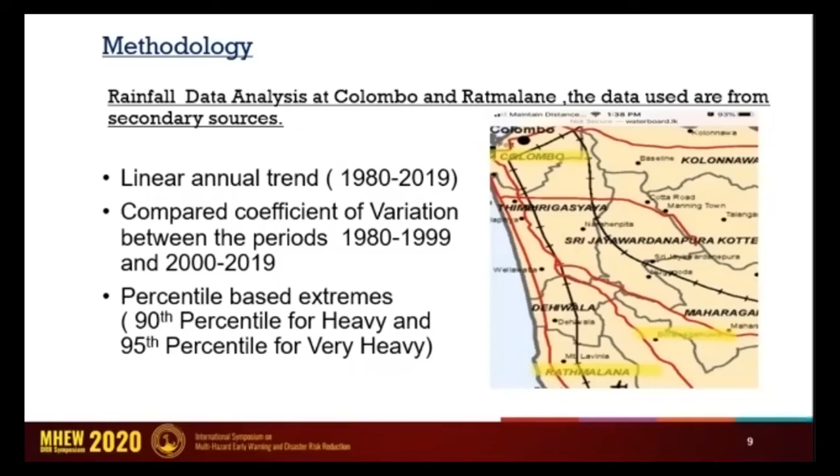To analyze rainfall data, both Colombo and Ratmalana rain stations were used since there is no rain station at Boralesgamuwa. The methodology used for rainfall data analysis was first a linear annual trend from 1980 to 2019, and comparing coefficient of variation between the periods 1980 to 1999 and 2000 to 2019. Then percentile-based extremes were calculated, considering the 90th percentile for heavy and the 95th percentile for very heavy rainfall.

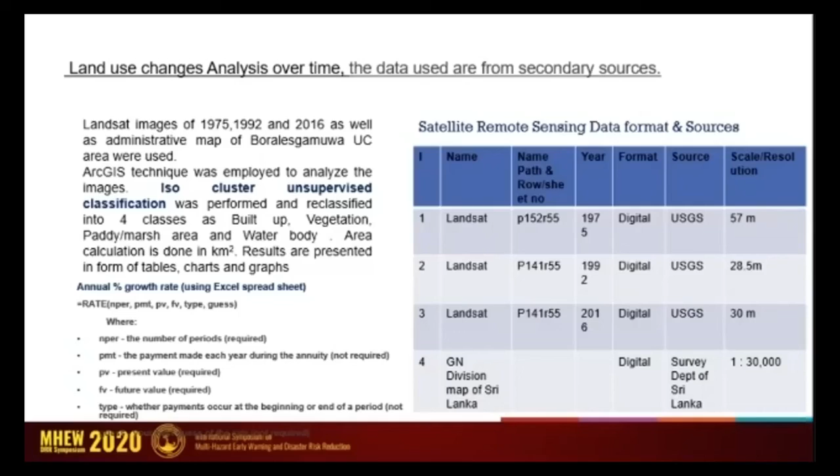The methodology used for land use change was Landsat images for three years, 1975, 1992, and 2016, along with the administrative map of Boralesgamuwa. I used ArcGIS technique by applying isocluster unsupervised classification. Four classes were reclassified as built-up, vegetation, marshy and paddy area, and water body.

These are the satellite images used. A questionnaire was given to 50 randomly selected residents above 18 years of age to find out how long they have been experiencing flood, the frequency of flooding after the drainage redevelopment project, and their perception of the causes of flood in the area, damages, future flood occurrence, etc.

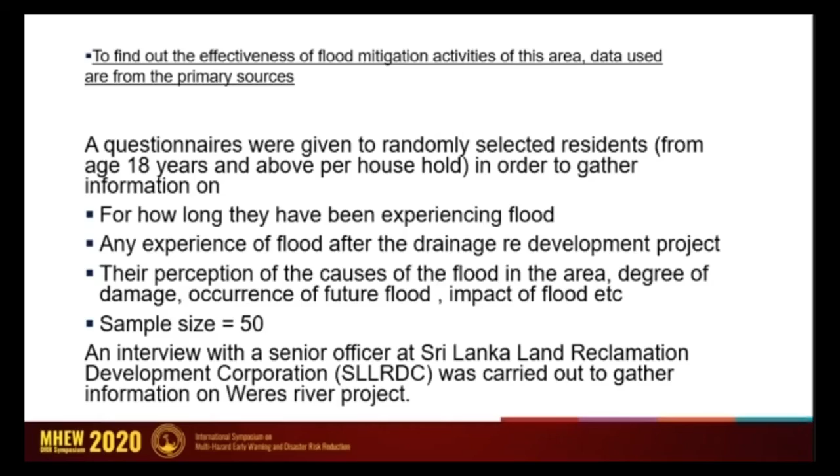An interview was done with a senior officer at Sri Lanka Land Reclamation and Development Corporation to gather information on the Weras Ganga river project.

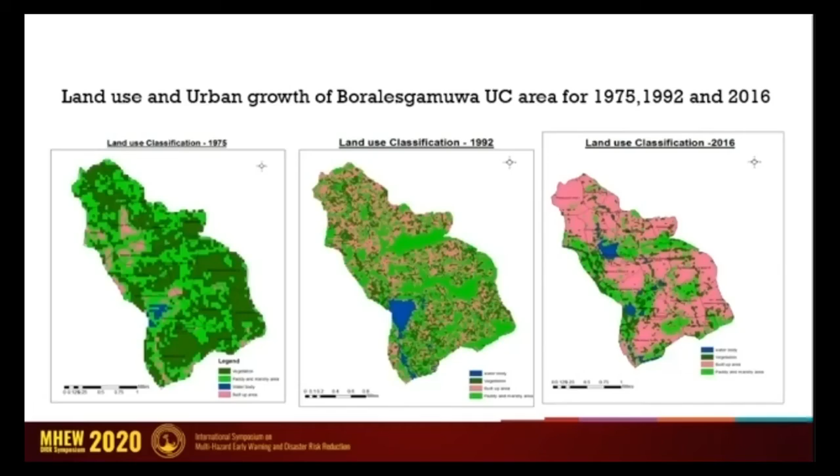This is the result of the three images after classification of satellite data. Green color is taken for vegetation and marsh area, while pink is the built-up area. This clearly shows how built-up area has increased and vegetation and marsh area has significantly reduced. The built-up area increased from 0.66 square kilometers to 6.49 square kilometers from 1975 to 2016.

The percentage of change was 883.3%. Vegetation decreased from 5.9 to 1.96, giving a percentage of change of minus 66.8%. There is an increase of water body when compared between 1975 and 2016, maybe due to built-up ponds by the project.

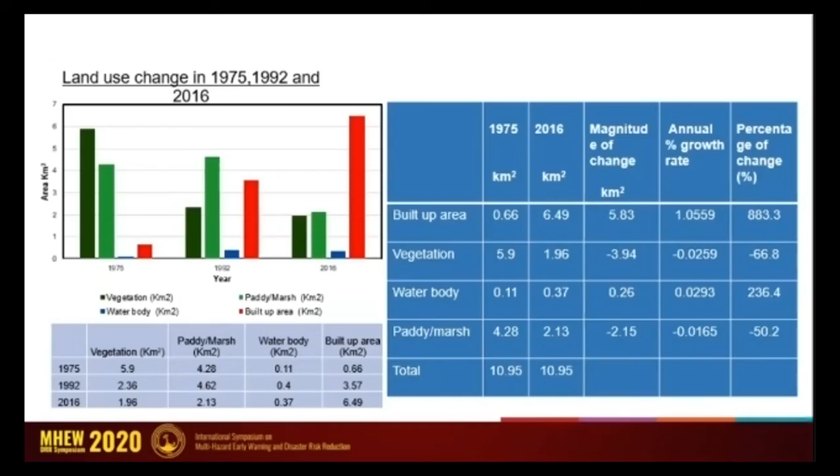Marshy paddy area decreased from 4.28 square kilometers to 2.13, giving minus 50.2%.

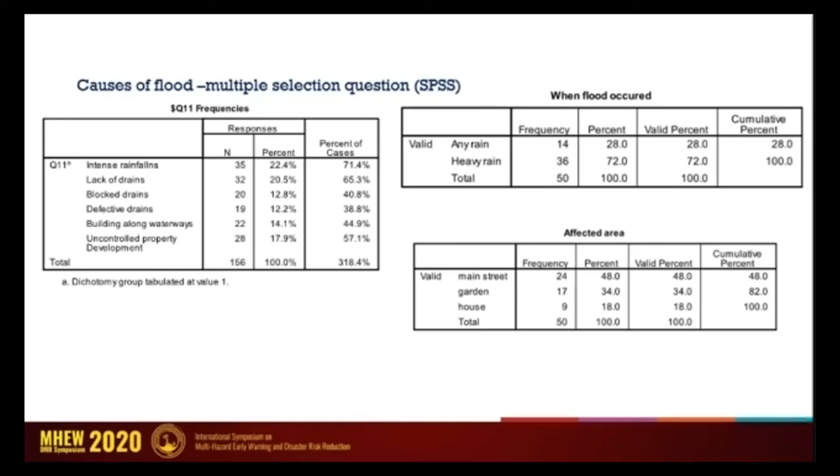The majority agreed intense rainfall is the key factor for flooding in the area. People's view was that flooding had drastically reduced after the Weras River project, but the area hadn't experienced very heavy rainfall since 2010, which was about 382 millimeters.

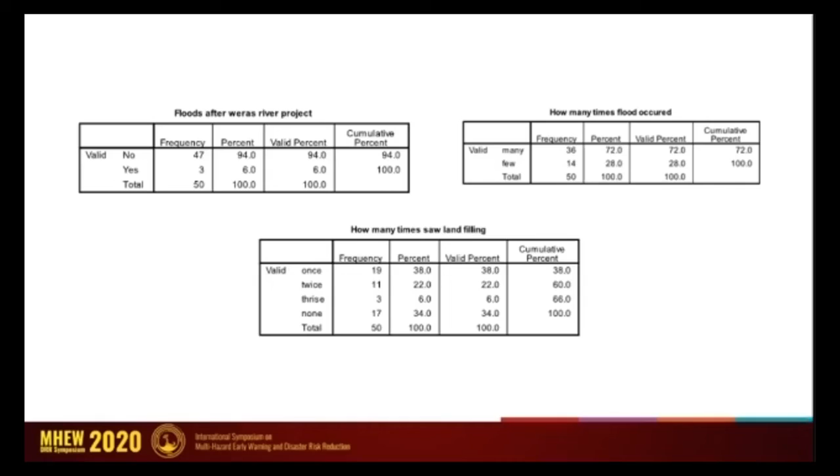Conclusions and recommendations: this study showed the annual rainfall trend was slightly increasing and variability has increased. Although we couldn't do a year-to-year correlation against flood and rainfall intensity, historical data showed floods occurred after heavy rain. This area's city growth was from 0.66 square kilometers to 5.83 square kilometers.

This has increased total impervious cover, which will lead to pluvial floods. The Weras River project was a well-planned drainage redevelopment project, but if legislative bodies are not strong and stop building along flood pathways, these improved drainages will not be sufficient to cope with intense rain situations like we experienced in 2010, which was 382 millimeters per day.

Rainwater harvesting can be implemented, thereby leading people into the practice of saving water as a resource, and introducing pervious paving for stormwater control.